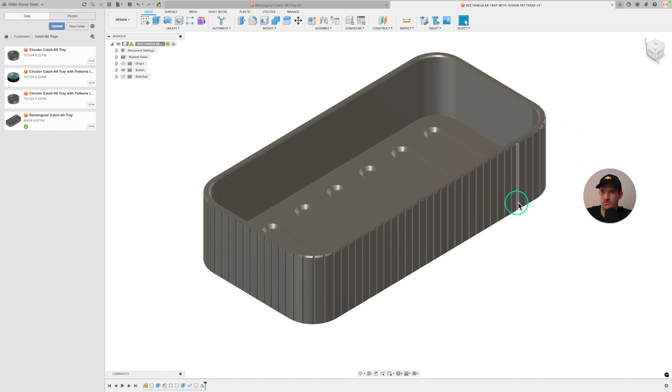Today we're going to be making a rectangular tray with patterns in Fusion. This is the tray that we're going to be making, and this is the one we did last time. So we're just going to basically be adding some features to this one.

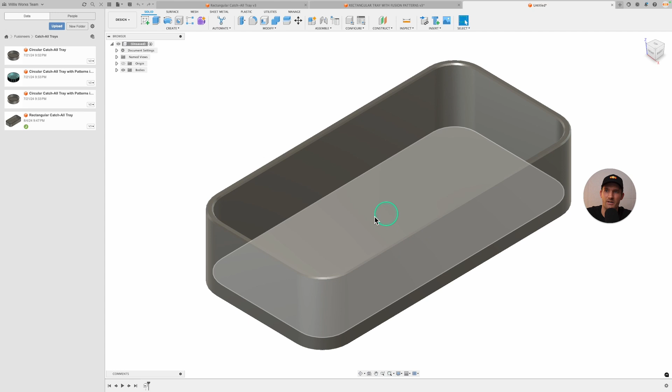One thing I wanted to start off with was making something called a derivative. If you click derive, this is a good way to make variations of basic parts. I'm going to select that as our body and click OK. You'll see this is in a new untitled file. So basically it takes a copy of that and now you can make variations of it, and it doesn't reference back, so changes you make here will not show up on the original copy.

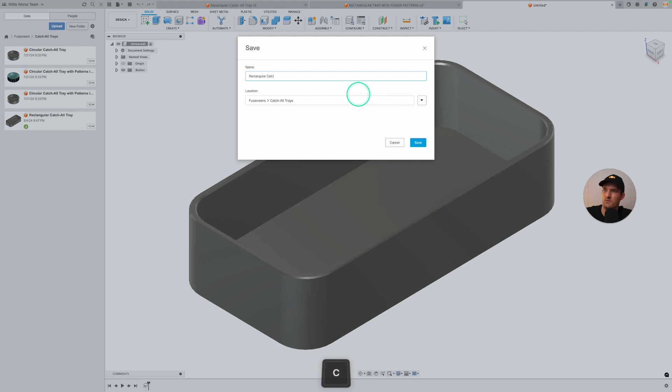So it's a good way to have a base part and then add features to it that you might want to test out in different ways. That's what I'm going to do today. I'm going to go ahead and save this derivative. I'm going to call it rectangular tray with patterns in Fusion.

The first thing I want to do is go ahead and make that slot pattern on the base or on the bottom here. I'm going to find the center point slot, select here, and just drag it out. I'm going to make this 30 millimeters and then make this, I think, 4 millimeters. That's what I did last time.

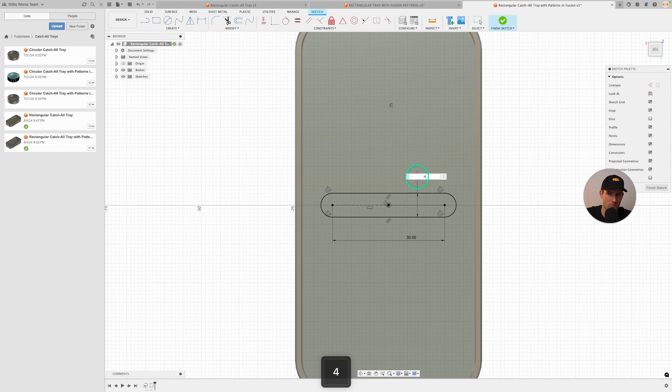Finish sketch. Now I'm going to extrude this out -1 millimeter, and then I'm going to modify, add a chamfer just to make it look a little better. And now we have that basic shape.

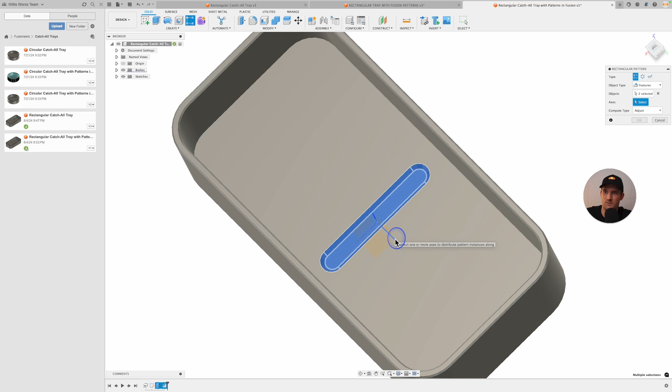Then I'm going to create a rectangular pattern, change it to features here, and select both of these as the features. The axis is going to be this axis here. Always try to remember to delete these unneeded patterns in that direction. Now I'm going to go 7, but I want it to be symmetric.

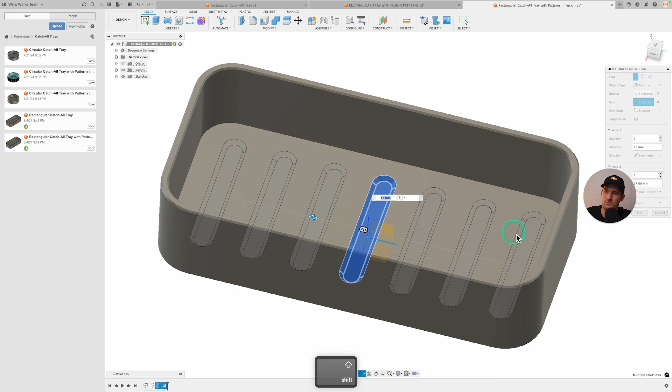My distance, I think somewhere around -- I should change it to spacing. Let's make it, let's say 13. That looks pretty good to me, nice and symmetric there. So that's how you make the grid pattern on the bottom.

Now we need to make this pattern around the outside, which is a little more complicated, but it's kind of similar to the one we did in the past with the circles.

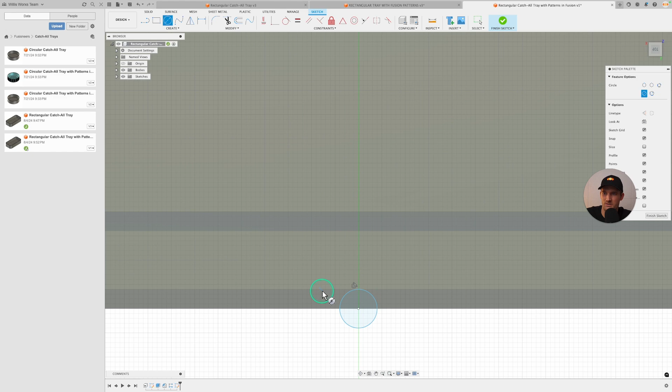I'm going to create a sketch, and I'm going to make it right here, vertical to the origin. I'm going to sketch it on this edge, and kind of like with the circle, I'm going to make it where the circle is tangent with this edge here. This is on a fillet if you want to see it from the side there. So I'm just going to cut that out, and now I need to fully constrain it.

One thing I like to do is the horizontal vertical here and here. Let's see what else -- it's probably, yeah, it's not dimensioned this way. So let's see if we can do a coincident here and on that edge, and then click finish sketch.

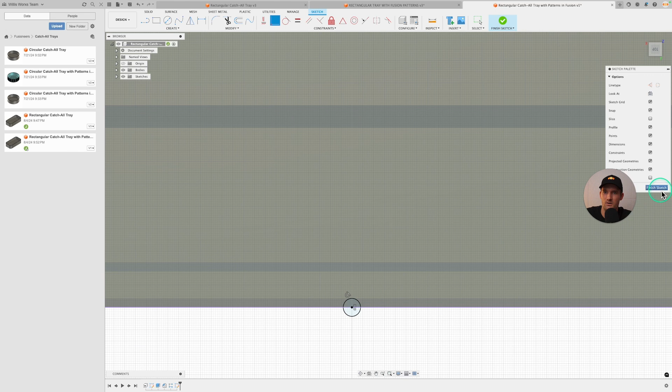Now we can extrude. I clicked E on the keyboard, and now we're just going to cut all the way through, change this distance to all, and it's just going to cut all the way through. Click OK. Now we have that first little point there.

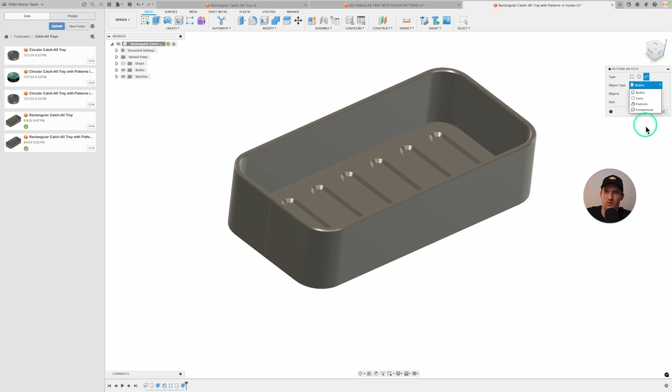Now the secret to making this pattern around this body is to create a pattern -- we're going to do pattern on path. Select that. Our object type is going to be a feature, which is the one we just extruded. Then we're going to select the path as this path right here.

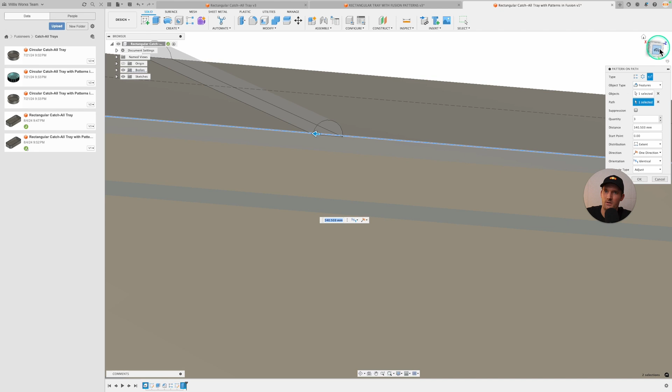And then you can kind of drag it all the way around. One thing I want to say here is sometimes you see how it'll snap -- that's really what you want it to do, but sometimes you have to pay attention to where it's snapping to. You can also see here, let's see if I can position it right.

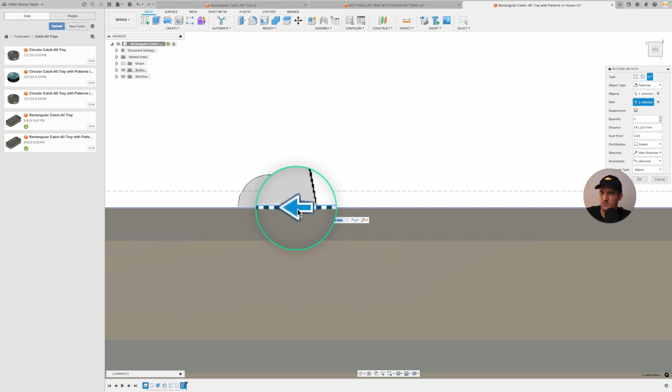The snap is actually snapping to the back of that part. You can kind of see that dot if you look really closely - there's a dot right there on the corner. It's hard to show you, but there's a dot right there where it's kind of snapping, that black dot by the arrow. So that's the midpoint, and it's snapping to the edge of this.

So we actually want to take this and subtract the radius of this to get it to be in the midpoint. So I'm going to say that distance minus, I think it's 0.5. Yeah, so now this is centered up.

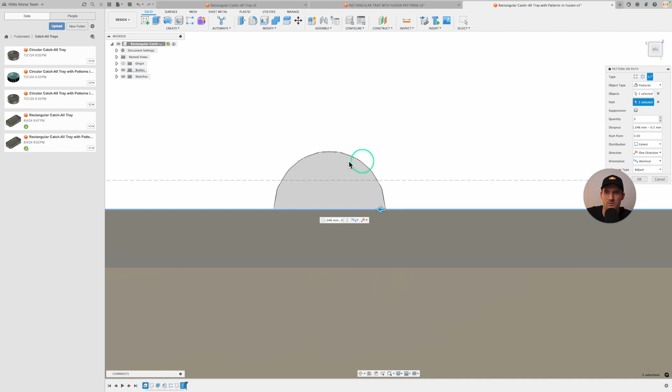The other thing we need to do is flip this to where it's the other way as well, so you can click path direction and usually that works. So now we flipped it and now it's not where we want it again, so let's snap it to here. And now it's snapping on this edge, so then we're going to say plus 0.5 because the radius is 0.5.

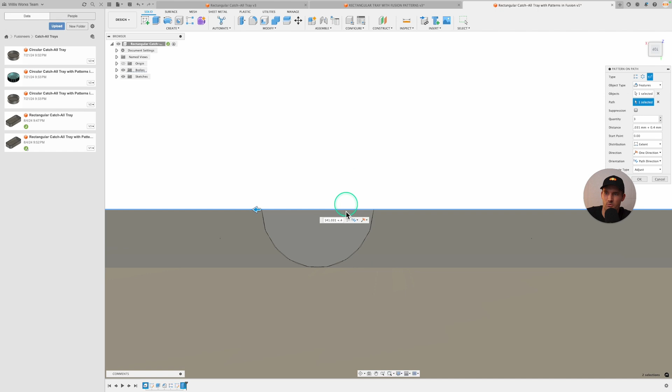Let's see again. So it looks like it's about, if we look at the numbers, like 141. Yeah, so I forgot that this radius is 0.4 - this chamfer is actually 0.4, so the radius is actually 0.4, not 0.5. That's where I was messing up.

So click OK, and now we have our cutout there. But we want to make a lot more than that, so we leave that same number but just change the quantity of them. Let's try like 40 maybe and see how that looks - you can kind of use different numbers here. I think I used 80 last time.

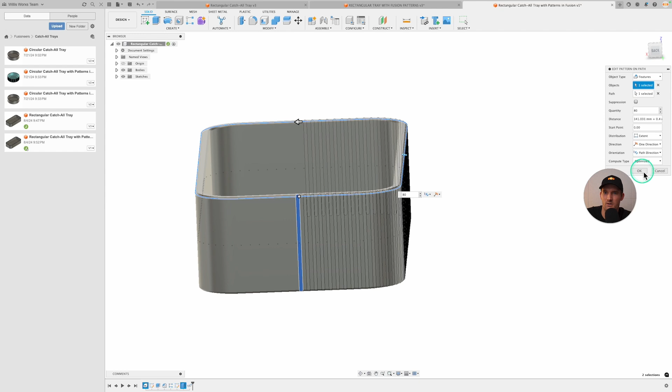And then I would recommend changing this to optimized, so that usually works a little better. Let's see if it works. All right, so now we have that.

I only do half at a time because it ends up just being easier to make everything symmetric, but you can try to do it all the way around. The issue though is if you do it all the way around, sometimes it's hard to figure out exactly how far off you need to make this to make it symmetric. So I usually just do half and then mirror it.

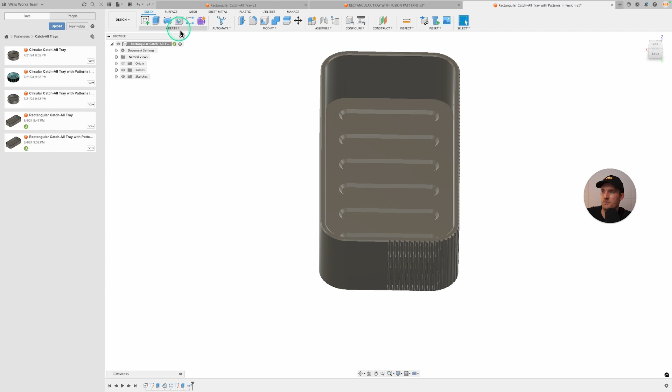So I'm going to create a mirror and then select the features as the original extrusion and then the pattern that I just made. And then the mirror plane is going to be this plane. So now we flipped it over, click OK.

Well, that worked last time I did it. Maybe let's try a few less patterns - let's try 60.

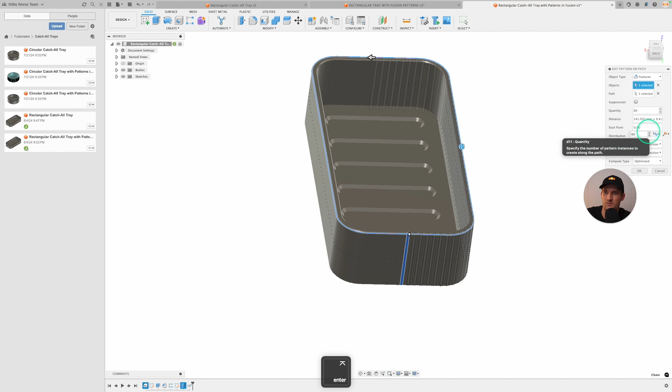And then create a mirror again, features, and then we're going to select these two again. Hopefully this works this time.

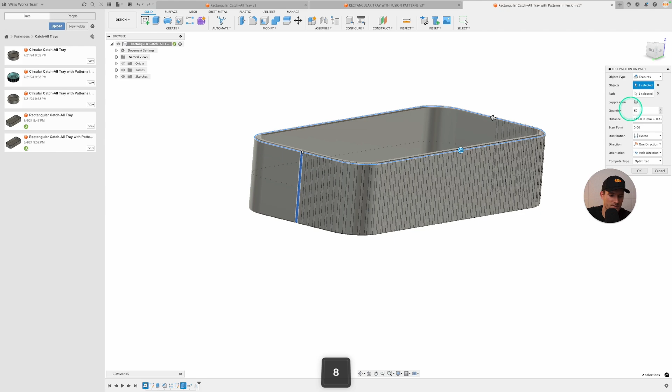Let's just make it optimized. There we go - so a lot of times if it fails, you just need to change it to optimized. I'm going to try 80 again and see if it'll work. Didn't realize I didn't pick optimize on that other one the first time. Yeah, there we go, so now we have our pattern container.

So hopefully that helps. The big thing is to just realize that you can pattern on a path, and this is how you make the sides. I think this kind of makes a nice little feature in the bottom - it's pretty common to see stuff like that in containers.